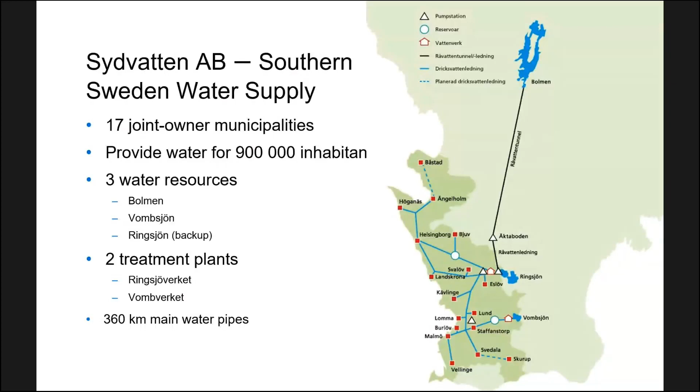So I have been working as a process engineer at Sydvatten since beginning of 2019, so not for so long, I would like to say. And my main focus is basically the living things in our water, where I have as one of my tasks to apply research into our daily work. So I would like to tell you a story about how Sydvatten started using flow cytometry, which is also my personal story into the world of drinking water. But it's also the story of how flow cytometry for drinking water got introduced in Sweden.

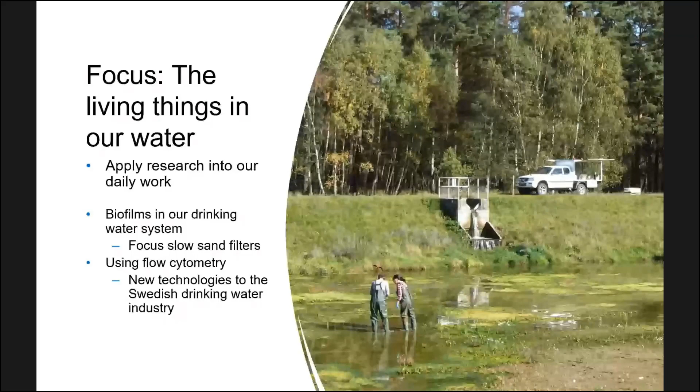So before working as a process engineer, I was an industrial PhD student at Sydvatten and the research company Sweden Water Research. My main research focus was on biofilms in our drinking water system, especially about how slow sand filters worked in the waterworks. So in my research, I applied flow cytometry to answer some of my questions. And I used a more advanced data analysis of the flow cytometry data to describe the results, combining both the total cell count and the fingerprint, meaning the HNA and the LNA.

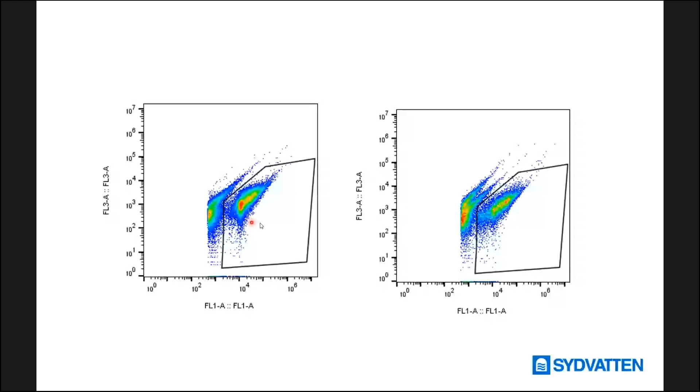So a simple way to put it is that it's basically the game to find differences between 2 pictures, by comparing water samples in this case, and everything can be summarized into a plot. For example, an NMDS plot that I will show you. So in an NMDS plot, every sample, which is represented as a dot, is the dot plot of the flow cytometer. So if 2 dots are close to each other, it means that the results from the flow cytometer are similar. If the dots are far apart, the total count and also the fingerprint from flow cytometry

are not so similar. So I used this method to study 3 different slow sand filters at the waterworks based on maturation. One was a well-established slow sand filter, full scale, and 2 new filters, also full scale, where we have one that contains old washed slow sand filter sand on the top with new sand at the bottom, and a totally new slow sand filter containing only new sand.

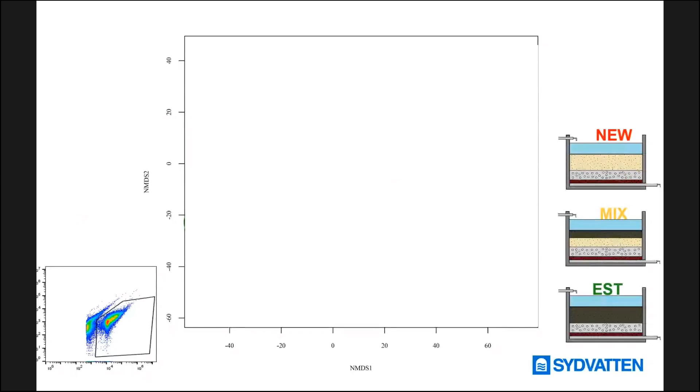So looking at the data, we see that this is the influent, the water going into these 3 different slow sand filters, and they are clustering together as one group, which is not so surprising, since these filters receive the same water from the same treatment plant. The interesting part is the effluent water.

Here we have the effluent water sample leaving the established filter in green over time, and we see that they are very similar to each other since the dots are very close to each other, and maybe most importantly, it is different from the influent water. So the biofilm living in this filter is able to transform the water from here to here based on

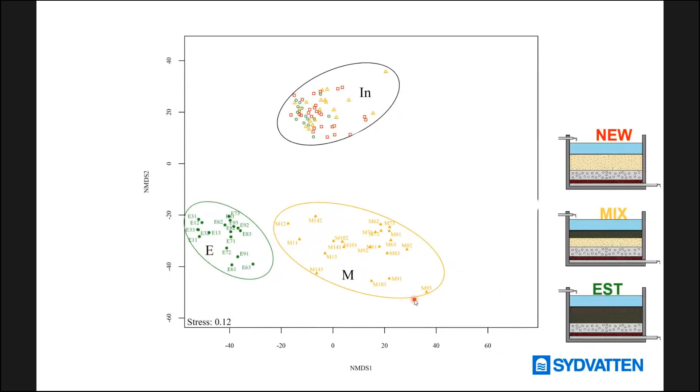flow cytometry. The new slow sand filter that was constructed with both the old and new sand ended up here in this plot. And as you can see, this cluster is more spread over time and different from the established filter. And the last filter is a sand filter with totally new sand that actually forms two clusters over time, with the end of the period forming a cluster quite close to the influent water.

So here we see that flow cytometry was able to distinguish water produced by different slow sand filters. And an interesting twist in this whole thing was that these clusters here were also related to E. coli content.

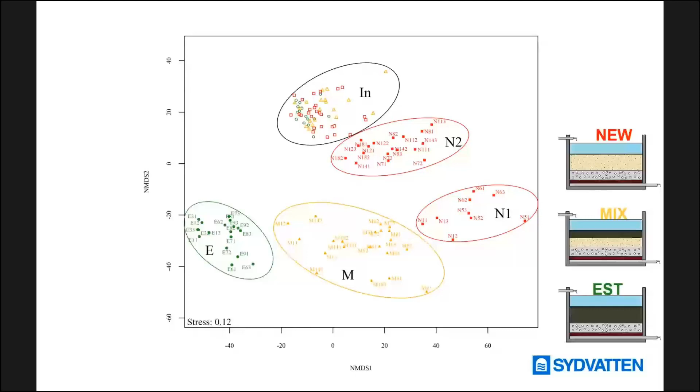So we see that using flow cytometry, we have great potential to reach our goal, which is always maintaining a good drinking water quality from waterworks to consumers. And we would like to do that in a rapid way, and it should be simple. Thereby, we can save money, but also, most importantly, we can save water.

FCM can also help us to get a better understanding of microbiology in our drinking water system, and can be a backbone for decision making and troubleshooting. So we see that BactoSense can have all these elements that we are looking for. So let me show you our summer plan with our two BactoSense that we have bought.

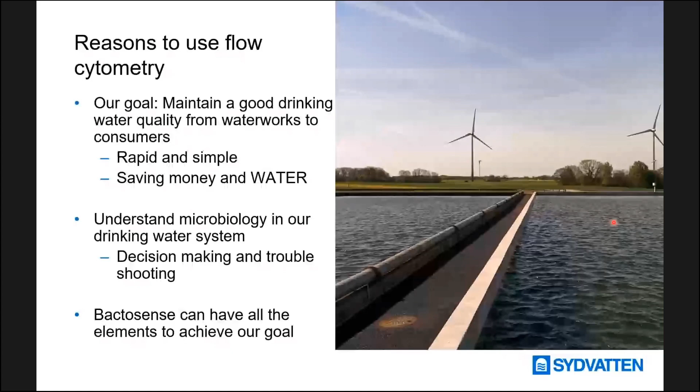So we are planning to use BactoSense to look into different events or different parts in our system right now. So for example, right now we have the BactoSense measuring the incoming and the outgoing water of a reservoir. And we have been doing so during the autumn and during the winter, and we would like to see how it will change during the warmer months, where we know that we can have some trouble with heterotrophs in

the system. So we would like to see if we can use BactoSense to see when we need to change the water level a little more drastically in this reservoir to avoid microbial growth in a smart way. We're also planning to see the effect of flushing and change in flow direction in the pipe system, and see if BactoSense can see that.

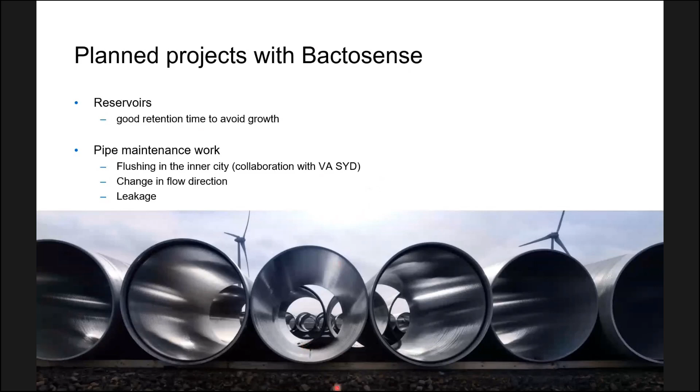So now I would like to show you an example where we have put these two BactoSense in the field and looked into a pipe leakage. So last summer, we had a pipe leakage in the middle of a field, as you can see here in the picture. And as always, after changing the broken section, we need to flush until the affected pipe section is clean, meaning no coliforms, no E. coli, and also low heterotrophic plate counts.

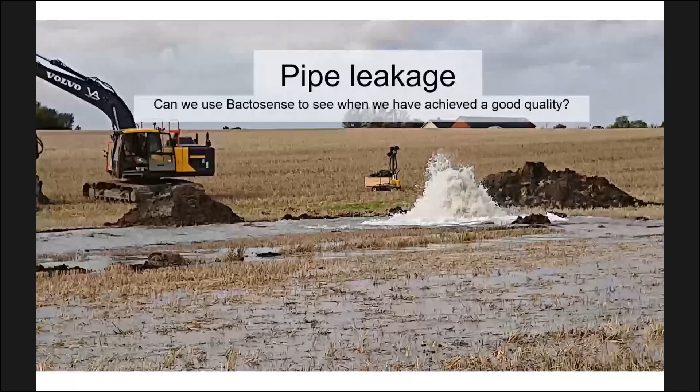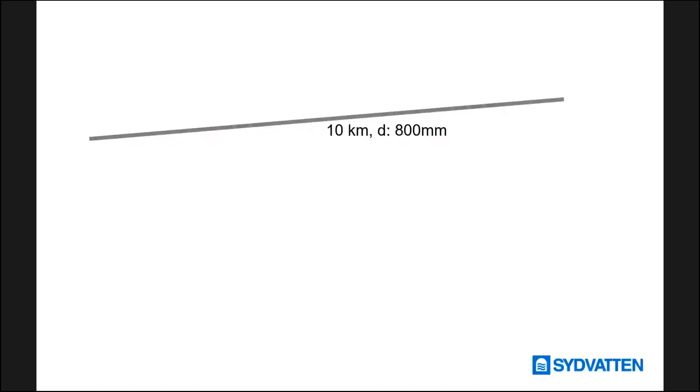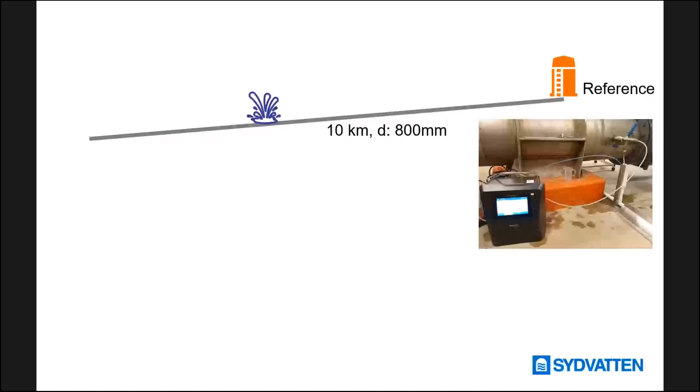So the question here is, can we use BactoSense to see when we have achieved a good quality, meaning that we have flushed enough? So we had a section of pipe around 10 kilometers with a diameter of 800 millimeters that got a leakage, approximately here. So we put one BactoSense upstream of the leakage, not affected by the leakage, and we put another BactoSense downstream of the leakage.

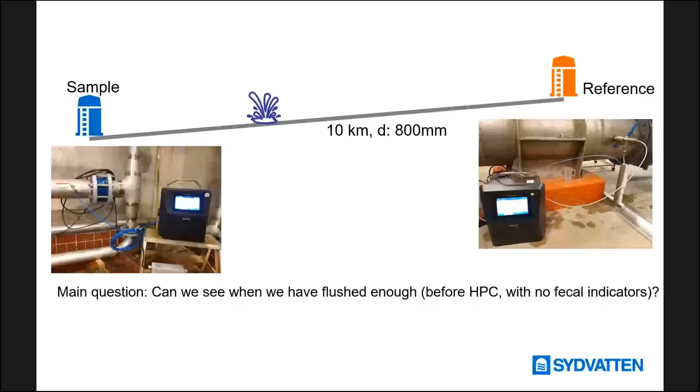So the main goal was to generate data and see if we can see when we have flushed enough after we have fixed the pipe section. But we also wanted to test out the BactoSense a little bit more: how portable are the BactoSense, how easy are the instruments to install, and are they suitable for all field personnel.

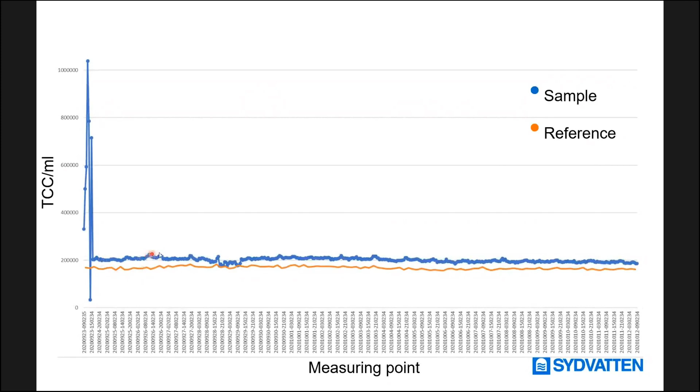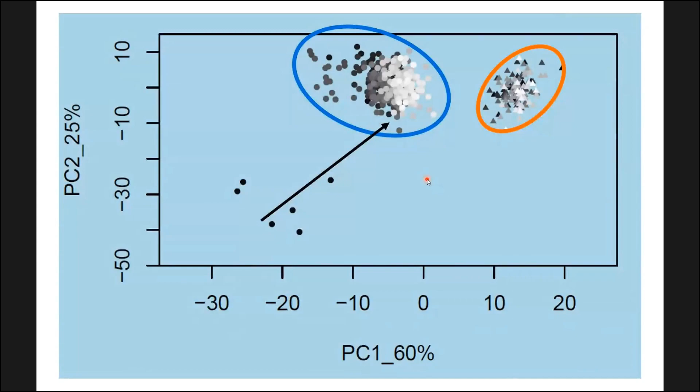And I need to say that these results are normalized results based on total cells, meaning that we have normalized the total cell content to be the same in each sample, in each dot plot. So the changes we see here are how the bacteria is moving in the dot plot and not in number of counts.

So if you are very interested in your data, which I am, and you would like to dig into detail, you can also get to know where in your dot plot you have the biggest changes. So in my case, in this leakage test, we have the largest changes in the dot plot in this area and also in this area. So by having this more advanced data analysis, you can also learn how to look at your data when you are looking at your BactoSense live.

I want to acknowledge my great collaborator, Dr. Nicholas Gadot, and also my former PhD supervisor, with whom I have many collaborations right now, Dr. Catherine Paul, for these exciting flow cytometry data projects. And this flushing event is a part of Mons Samour's master thesis that he will present during this summer.

But going back to our question for this test, we think this kind of setup with BactoSense has a great potential to follow our flushing work, for example, in a system. The results combined with a smart data analysis can be the future way for us. Our next step is to actually apply artificial intelligence on this data set and see if we can predict if there will be any changes in the data or not using the reference sample.

For the more practical part, it was easy to install and move the BactoSense to the different locations that can be a little bit tricky to go to. And our field personnel didn't have any problems to check it during sampling or changing the sampling tap to install the instrument. That was quite easy according to them.